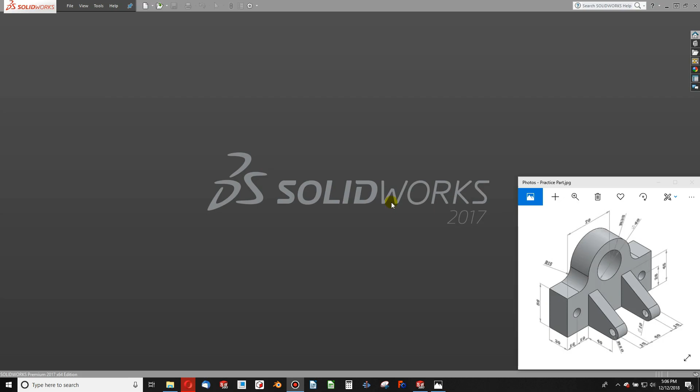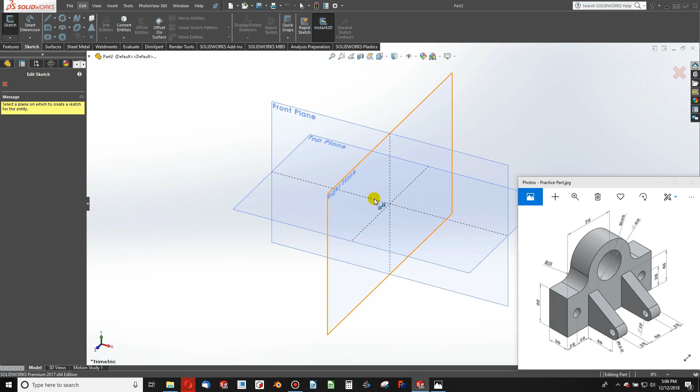I'd like to go over today how to make the simple practice part below. Let's go ahead and get started by opening a new part. I'm going to go onto my Sketch tab, choose Sketch, and depending on how I want to orient this part, maybe I would be best to orient it the way that we see in the picture. So if that be the case, I'll extrude this face here, and it looks like it would be most appropriately on the right plane. So let's start working on this profile here.

We're given a few dimensions. This looks like a highly symmetric part that I would like to do an example on. So let's do both a sketching mirror and a feature mirror. We'll mirror the base with a sketch, and then we'll mirror the feature here. So I'm going to get started by making a line, and it looks like I have to do a little bit of math because I don't have all of the dimensions available. Oh, it looks like I do. I've got 70 right here. So let's make this a distance of 70.

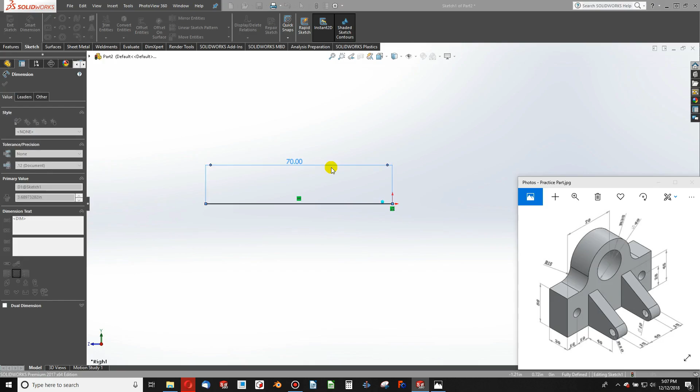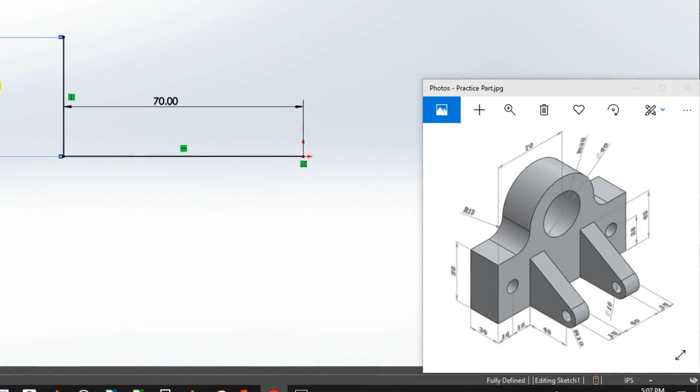This is probably in millimeters. I'm just going to leave this default to my inches. So this will probably be 25.4 times larger than it needs to be. But for an arbitrary example, that's okay by me. We're going to make this a distance of 56, referencing this height.

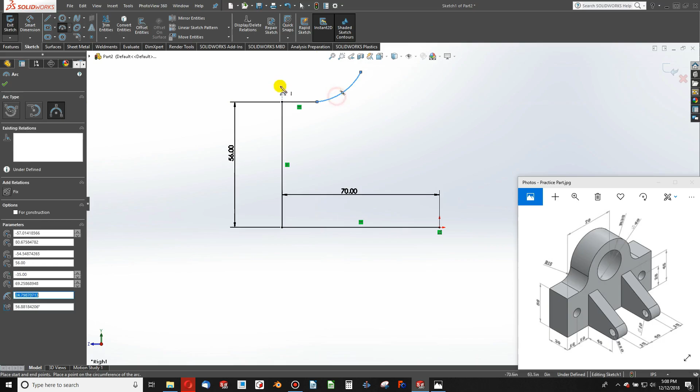And as we come over here, it looks like we have a dimension given for the hole center, and we don't have a dimension given for this length that I see. So I'm not going to dimension that on my sketch. Instead, I'll go right into a radius without giving a length to that line and making this tangent. Now I've got another 3-point radius. I'm going to end this at the top here so that we can mirror the sketch and make these tangent, with this being vertical over the origin.

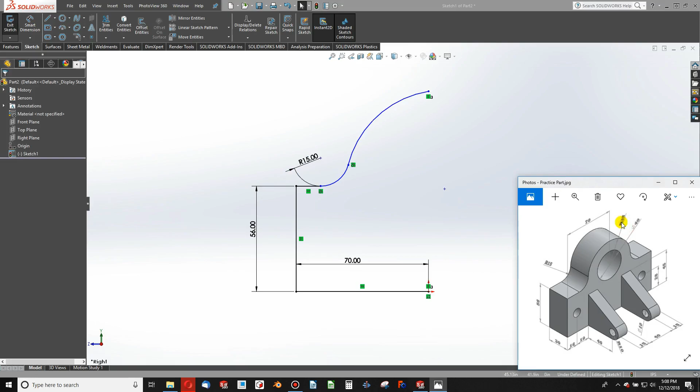I'll give the appropriate radiuses. Looks like this one is 15, and this radius, that's a little bit hard to see. It looks like 35, a radius of 35 on this outer radius. Now I know I want this to be tangent to horizontal. So we'll highlight these two and make it tangent with my horizontal line.

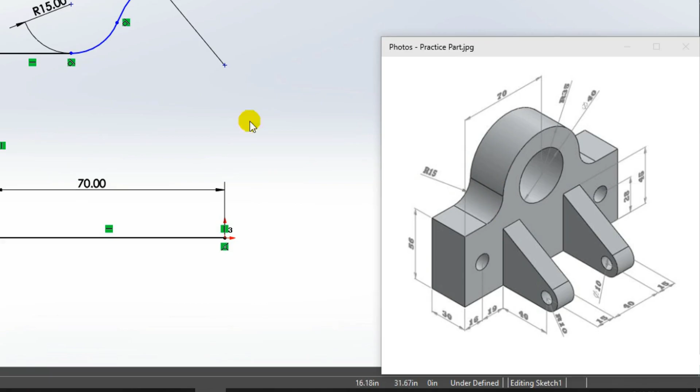Finally, it looks like I'm not constrained on my overall height. I don't see an overall height given, nor do I see any dimensions that constrain the hole center. So I don't see very much geometry that would tell us what this overall height would be in regards to this dimension. Usually there's an assumed geometry when that happens. And so I'm going to assume that at this tangent point we are tangent to vertical. To make it tangent to vertical, I'll simply highlight the tangent point and the arc center and make them horizontal. Because when we are horizontal with our center, we are vertical in the arc. So we're going to assume, based on this drawing, that that is the dimension that we should apply.

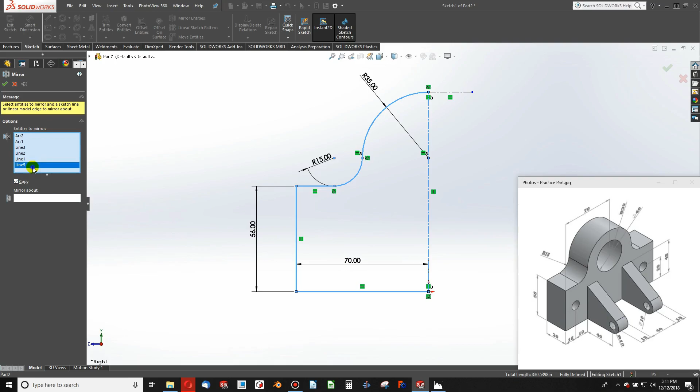Finally, I'm going to add a center line, and I can do this to any length. Might as well do it from the bottom to the top. And I can choose mirror entities, and I'll choose these entities here, and I'll mirror about this dotted line. Oops. If I accidentally add the dotted line, I simply right-click and delete, and choose this line here. Now we'll extrude. It looks like we're given an extrusion depth of 30. So features, extrude, and 30.

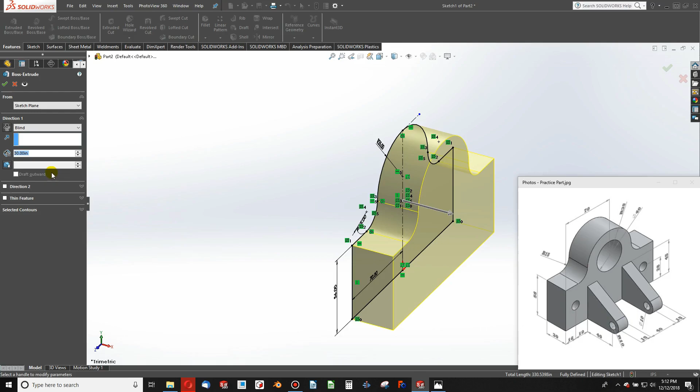I can make this mid-plane. I don't see much benefit to do so because we're not symmetric about where we're extruding. So that's all right.

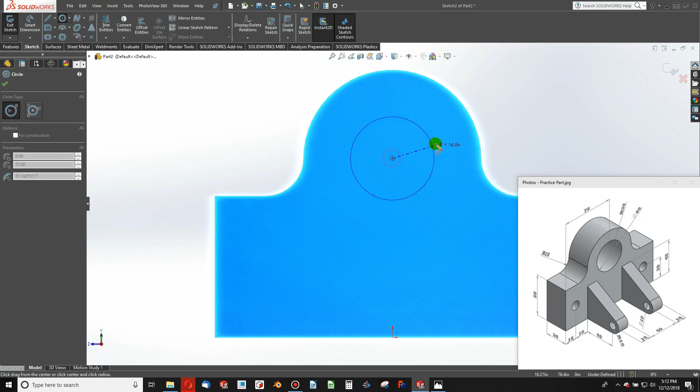Now I can highlight this face, maybe sketch on it, and add my holes. It looks like we have a geometry where this hole is concentric with our outer arc. So highlight the arc and then sketch on that little center point of the arc. And we'll give it the diameter of 40 that the drawing says. Likewise, I can position these holes as well.

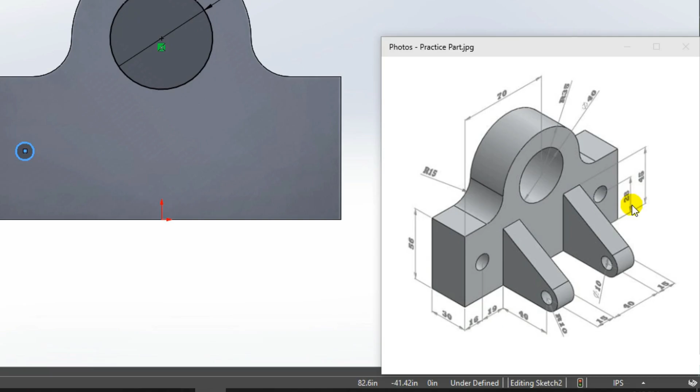I'm given a distance from the edge of 16, and it looks like these are both 28 from the bottom. 28, and 16. I'm not seeing a diameter for these holes. This one has a diameter of 10, and so it looks like this would probably be a typical feature that would be applied to all holes, even though the drawing doesn't seem to explicitly state that. So we'll give this 10.

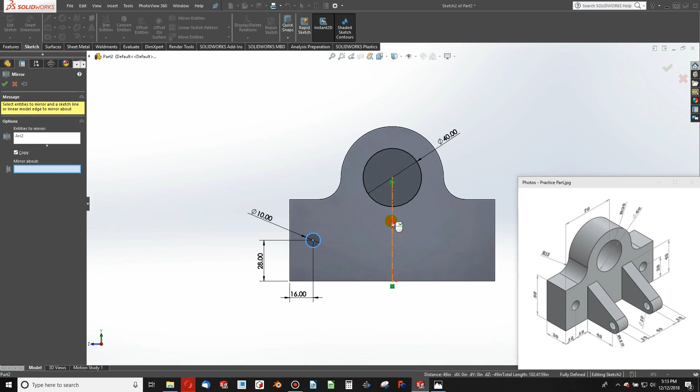And since we've mirrored once, we can resketch another hole. But since mirroring seems to be the theme of this video, I will mirror this feature across. Whoops. Again, some old habits here. Across this, and there we go. Features, extruded cut, through all. Now we have our holes done.

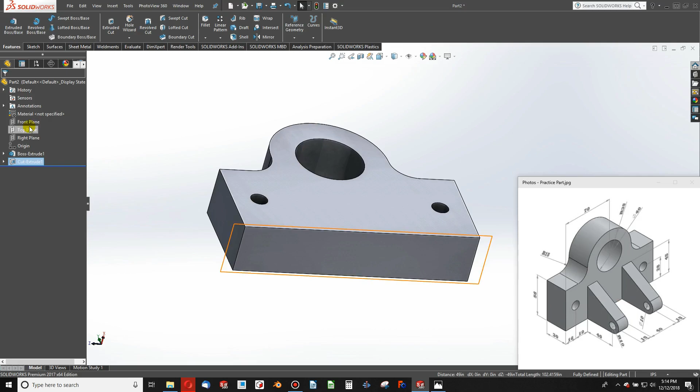So let's talk about this feature mirror. It looks like between these two faces is a distance of 40. I can make a new plane, but why go to the trouble? I'll go ahead and sketch this profile on our top plane. Yep, I'm on the correct side, so I will begin my sketch, and I can start in this corner.

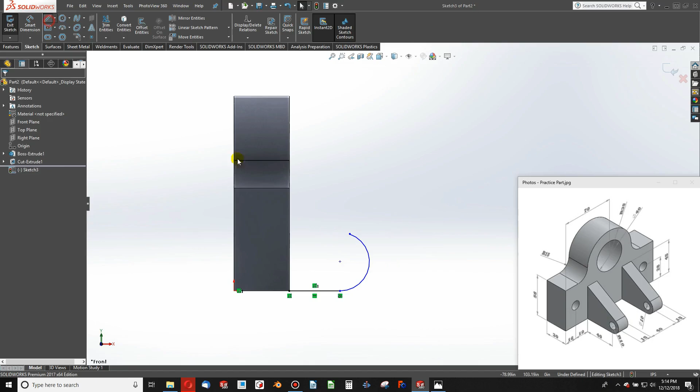And I'll use a 3-point arc, tangent, and we'll make this tangent as well. And we'll close off this surface. All right, now we see that these holes are concentric with the outer arc, so I will grab my smart dimension, and relative to this face, we know we need to be a distance of 40.

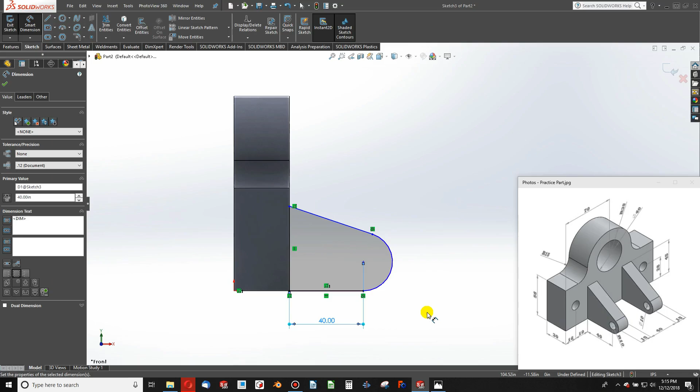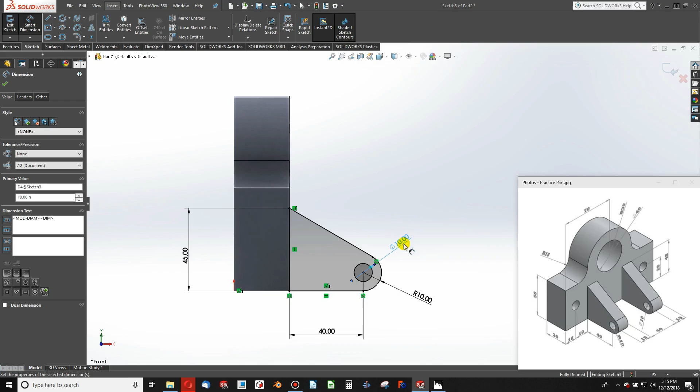We also know that this is a radius of 10, and we know that this height should be 45. Finally, I can add my hole. Smart dimension to 10. And we're fully defined on our sketch. So let's go to extrude this.

Now, of course, we know we need a thickness of 15 and off-center because we're sketched right on the center of that. And we know the off-center, we're going to go a distance of 20 and then another 15 for the outside edge. So we'll say features, extrude, and we can even say 20 plus 15 if you don't even want to do the mental math. And then we can, so that will be our final offset, and then we can go off of our sketch plane offset a distance of 20. And it looks like I've just placed my sketch, so I can just type in my 15 here.

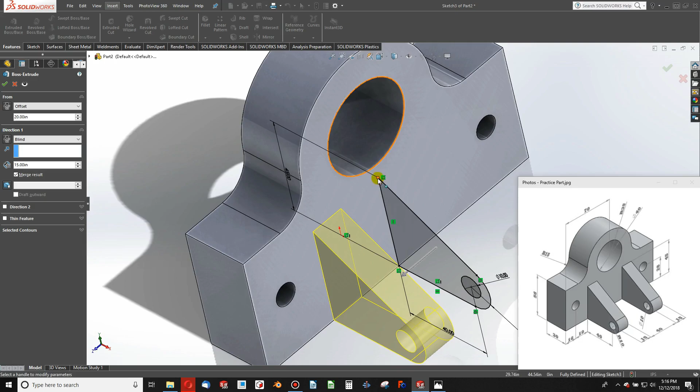So as you can see, I've gone a distance of 20 off of my sketch to satisfy this dimension. And then I've gone another 15 thick. And I'll accept that. And now I simply need to mirror this feature to the other side. And I've oriented my sketch in a way that I've got my front plane running as a line of symmetry.

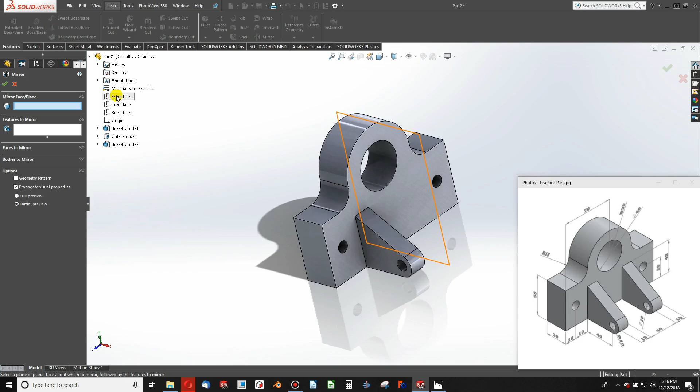So I will choose mirror. Front plane is my mirror face, and my features to mirror is this extrusion. It looks like we've completed this sketch, and we look remarkably similar, so I think we were correct in assuming that this tangent point was a vertical point.